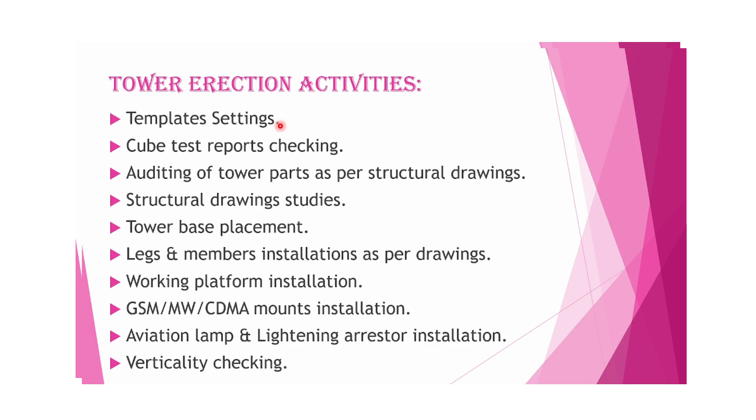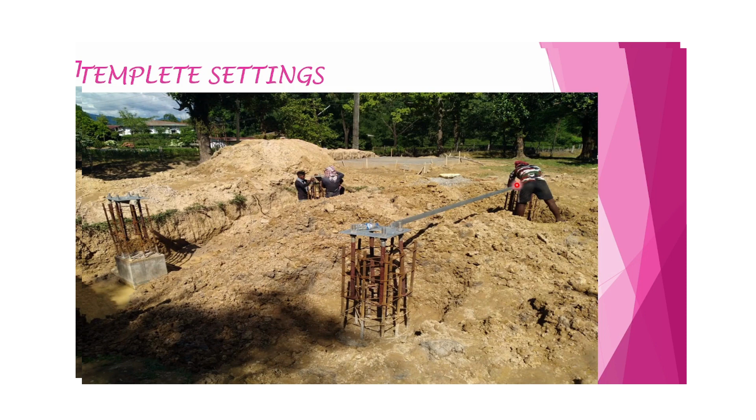This is how we have to start the template setting. First, the plate has to be fixed temporarily with the foundation mold, and that has to be tied temporarily with the column rods. Then the member has to be placed from one column to another column. After that, we fix all the members from one column to another with the template, and the template has to be placed properly. Each column requires 8 members of foundation bolts, and this foundation bolt has to be fixed on the column rods. All this has to be straight, and the level has to be measured. After measuring the level, we have to do the shuttering of this particular portion for final casting.

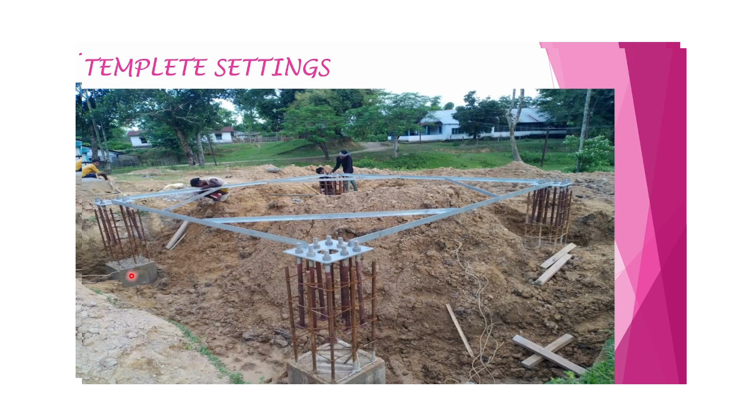At some places, workers are doing template setting without doing the half casting of the column, which is not recommended, because we have to cast half of the column and do backfilling so that we can get the working platform for doing the template setting. Here they have done it without casting half of the column, that's why they are facing difficulty doing the template setting and taking the leveling.

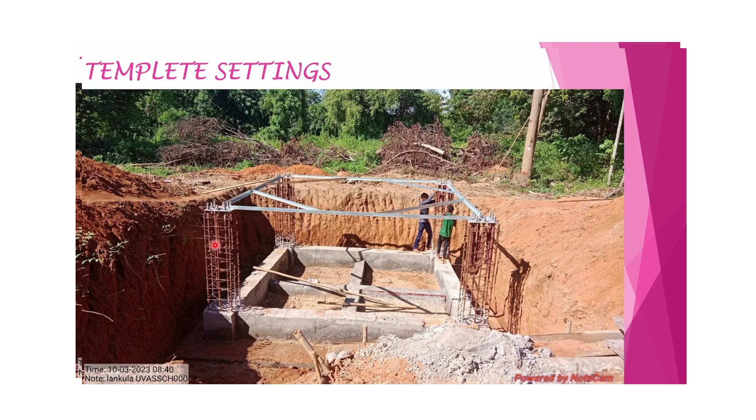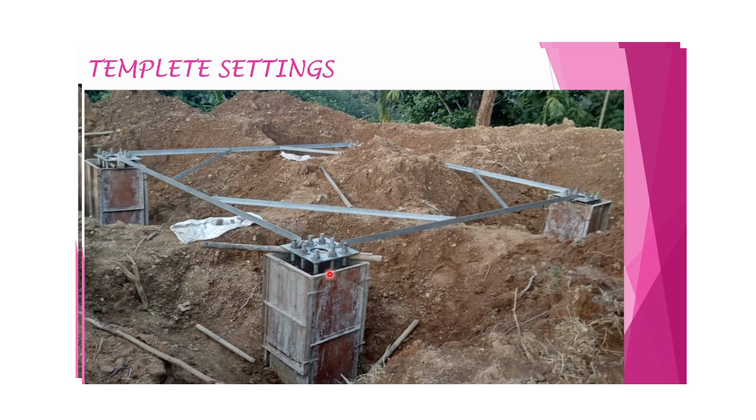So we have to do the shuttering as I said earlier and do the final casting of the tower. During the time of casting, we have to use a vibrator to do the proper setting of the concrete mixture.

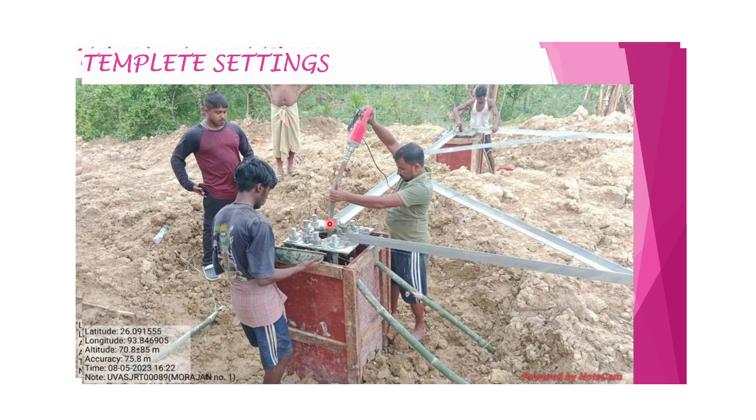The water level has to be checked for each base plate of the template, with each other, with all 4 columns. That water level has to be accurately checked, otherwise tower installation will be hampered.

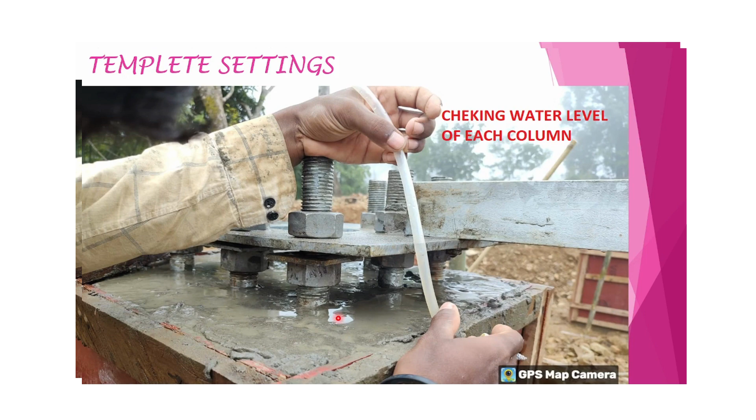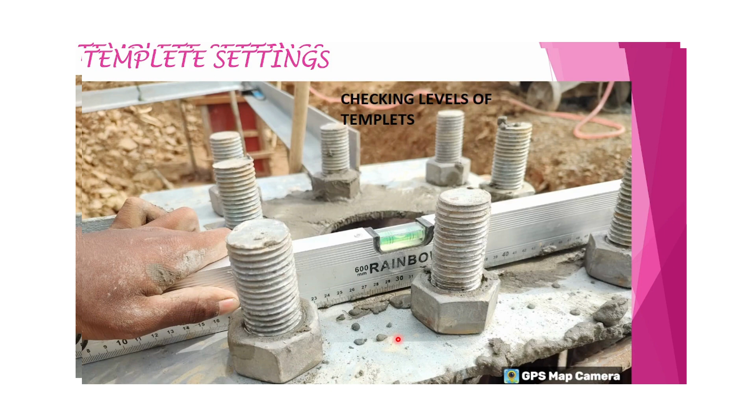Water level checking again with another column base plate. Then surface inclination to be checked with the spirit level. Again, this center portion of the bolt above the base plate to be checked to have uniformity between all the bolts, approximately 100mm above the plate.

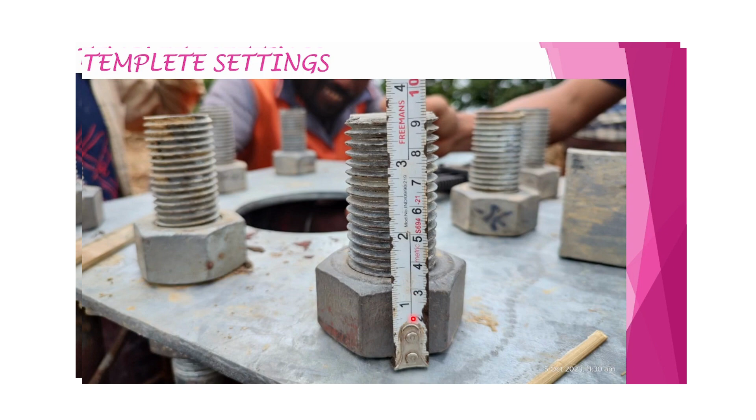After casting, we can remove the shuttering and let it cure with proper watering.

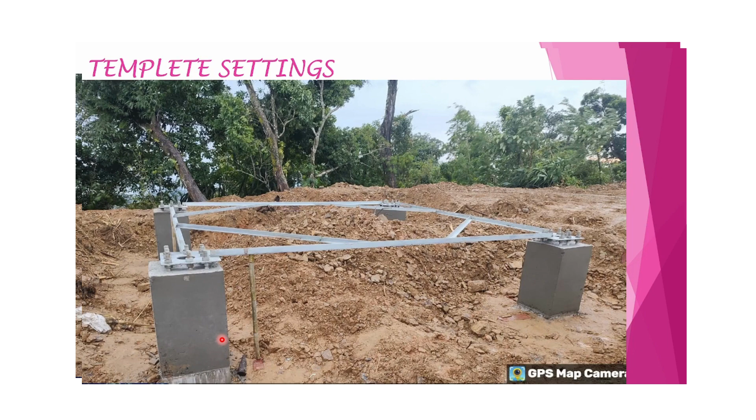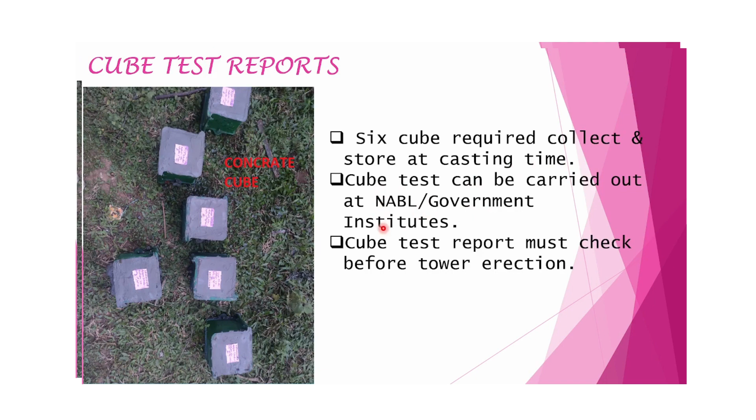Cube test report to be collected before doing the tower erection. 6 cubes required to be collected and stored at the time of casting. Cube tests can be carried out at NABL lab or government institution. Cube test report must be checked before tower erection, which is very important.

Tower installation team has to audit the tower parts, which is very important before tower erection. Each part to be verified, and any shortage to be reported to the supplier immediately. Otherwise, tower erection cannot be done.

Safety measures to be taken for the team, like safety harness, safety belt, helmets and shoes - all has to be taken care of for the erection team. Also, rope and pulley has to be there for smooth erection of the tower.

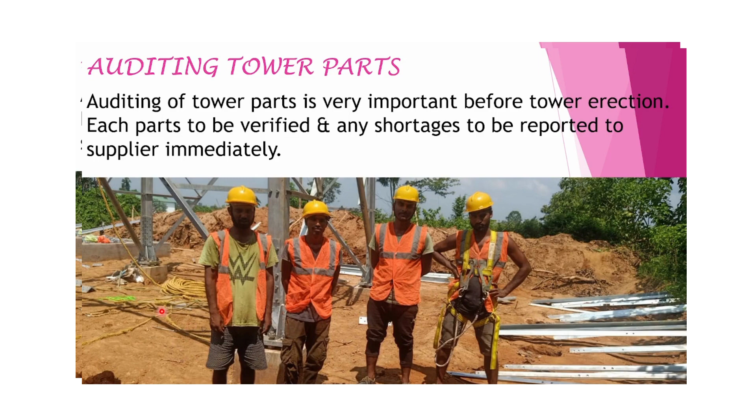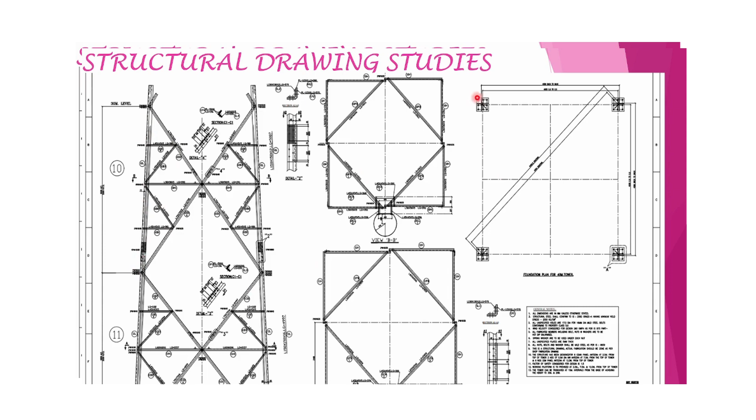Structural drawing study is very important. I cannot show you here because it's a very large drawing that has to be studied separately. The members are mentioned here - names of the members are mentioned here, all the members and length. This can be studied at the field before doing the tower erection.

Placement of the tower base plate: after removing the template, we have to put the base. As per the design, just above the concrete, we place the tower base plate. Then a square washer has to be placed above the tower base plate, and then two nuts have to be placed.

But if you see in the picture, the erection team has put the nut below the base plate, which is not there as per the design. The erection team put this nut because during the time of template setting, the template leveling was checked by placing the template above these nuts.

So after removing the template, they did not remove this nut just to avoid disturbance of the leveling. So if they remove this nut, then the leveling of the surface has to be checked again for all the columns. Then only they can put directly this tower base.

So it is recommended that this nut has to be removed, and again the surface level of this column has to be checked for all four. Then you put the base of the tower directly as per this drawing.

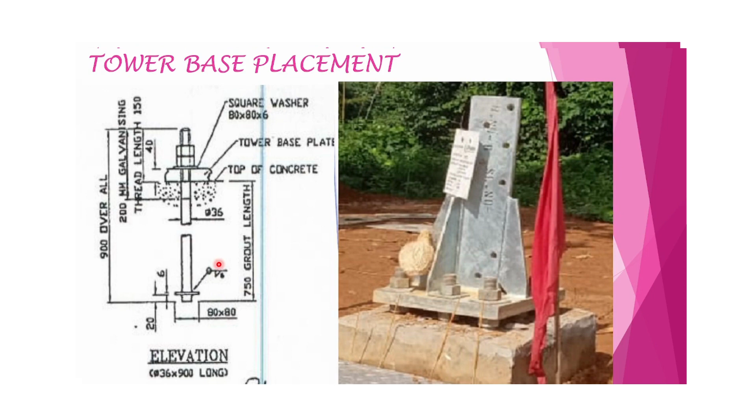So after placement of the base, you can put the tower legs, all four tower legs. Then members have to be put accordingly. After that, again the second stage will start.

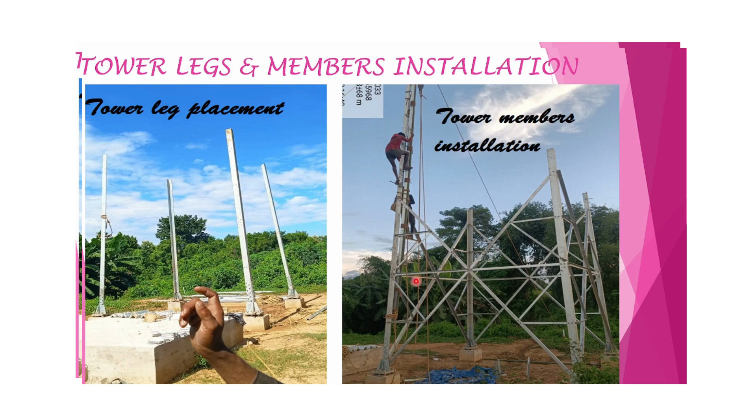You can lift the material with the use of pulley and rope one by one, and can start the tower erection.

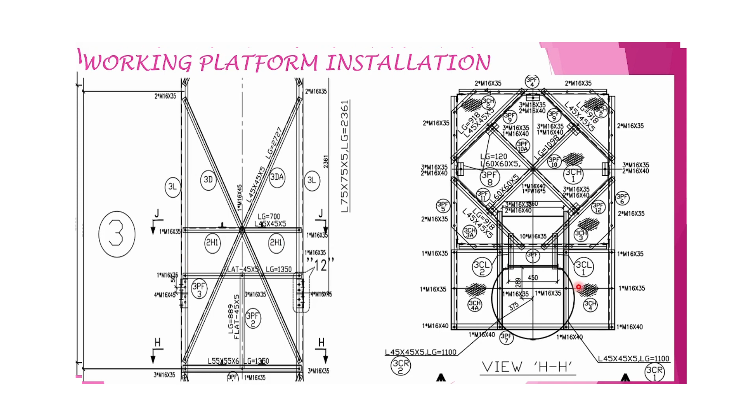Platform installation. There are two platforms in this particular tower. One is installed at member L3. This is the top view of the platform. This is the ring, safety ring, and this is the climbing ladder. And these are the working platforms, two working platforms as I said earlier, upper working platform and lower working platform.

So another platform is installed at L6. L6 is this member basically, and L3 is this member. L1, L2, and L3, then L4, L5, then L6. This is the L6 member. So working platforms are installed, one at L6 and another at L3.

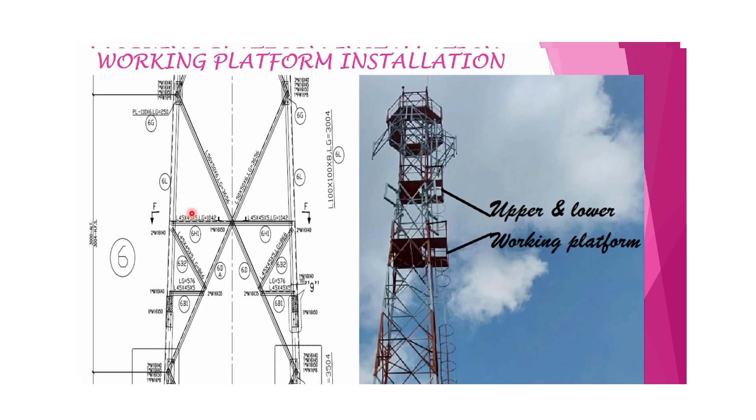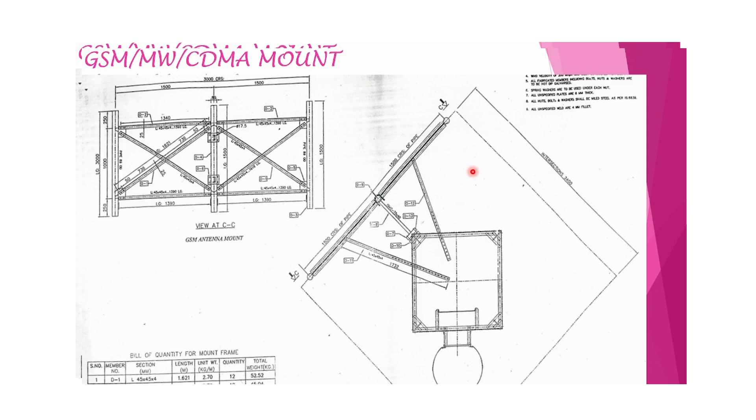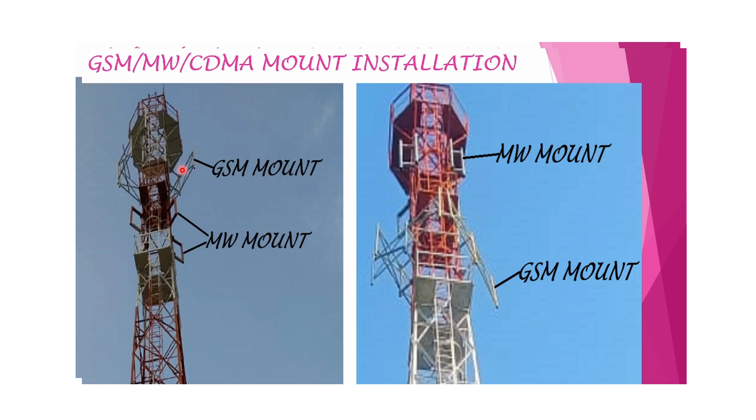Microwave mounts may be installed on this particular side. From the LOS clearance point of view, you need the microwave antenna at a higher height, higher level, so it is installed there. Again, in this particular site, microwave is installed at the lower working platform, maybe because this side is proposed to connect with optical fiber. So GSM is put at the upper working platform for better coverage.

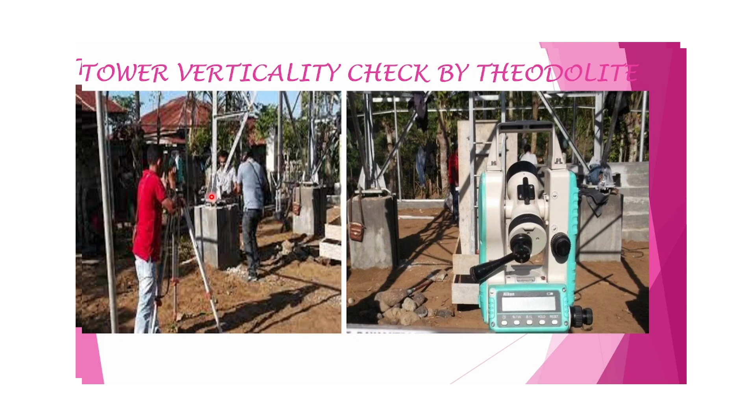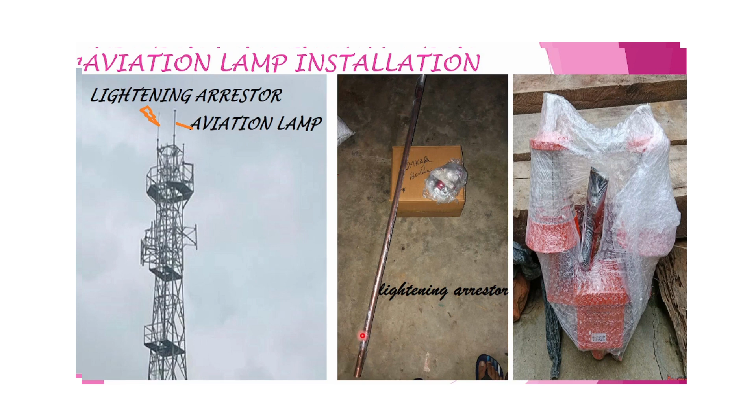This is how tower installation can be done. In this particular...